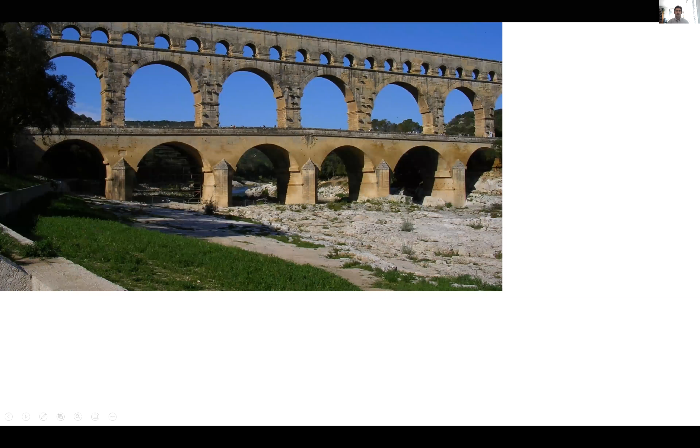Throughout history, water undoubtedly has been the most important resource for successful civilizations as well as thriving animal ecosystems. This is perhaps best exemplified by the Roman aqueducts as shown below. It was very evident to our early brothers and sisters that having sustained and easy access to water was paramount for the successful survival of their civilization.

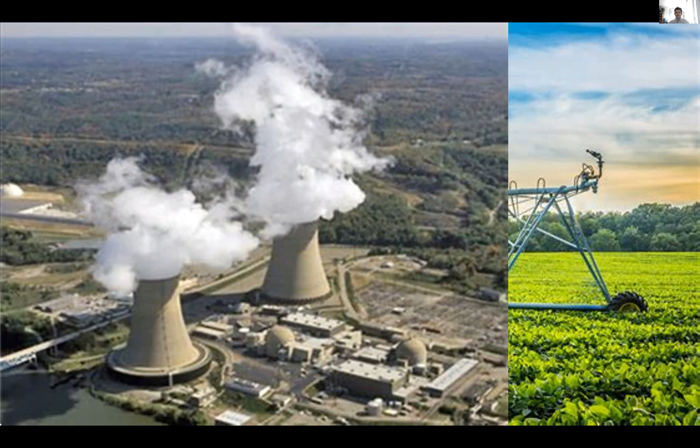As we move throughout time, this has not changed. We are still extremely dependent on water in more ways than we can even imagine. For instance, the agricultural industry in the United States consumes 137 billion gallons of water per day, while the power industry consumes 190 billion gallons of water per day. These two sectors account for more water usage than any other industries combined domestically.

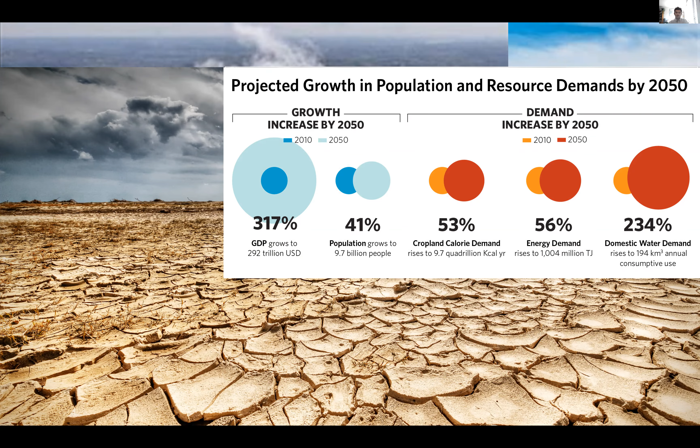And unsurprisingly, this has led to areas across the United States that look like this: semi-arid, dry regions that are water stressed and facing extreme water scarcity. And as we continue to have anticipated population growth by 2050, with some estimates anticipating 41% population growth, and some estimates indicating that because of this, energy demand and food demand will increase, and thereby water demand will increase to the tune of 234%. Where is this water going to come from?

And it's easy enough for us to say that water is the giver of life and master and servant of mankind, and we should start thinking about these problems sooner rather than later. And this leads us to our market problem. How can we meet this projected 234% increase in demand, especially when only 3% of all the water in the world is fresh water, and of that 3%, only 30% is usable ground or surface water?

Finding low cost and new ways to treat non-traditional water sources is going to be paramount. And when I'm talking about non-traditional water sources, I'm talking about water sources that you wouldn't normally think of when you think of where to get water from. So for example, I'm talking about produced waters. And produced waters are essentially waters that are produced from some sort of industrial activity. And for this instance, I'm going to be talking about produced waters from oil and gas companies.

And it's quite astounding. When you actually drill for oil, you don't just get oil that comes up. You actually get water and oil, and actually a lot more water than oil. In fact, you get 10 barrels of water for every barrel of oil. This is actually astounding and kind of mind-boggling, really. And it's estimated that in the United States alone, we produce 630 to 840 billion gallons each year. That's 1.72 to 2.3 billion with a B per day. The average urban area consumes about 300 million per day, to put that in perspective.

And so currently, a lot of this is actually just re-injected into the ground, 90% of it back into the ground. 10% of all the produced water is actually low enough in salinity that it can be sold and then blended with fresh water. So the way this works really is because you're drilling at different sites, you get different salinity waters when you bring up the oil. And some of it's low salinity enough that they don't have to treat it much, and they can just mix it with fresh water and sell it. And they do right now in Bakersfield, California, selling it around $1.25 per meter cubed.

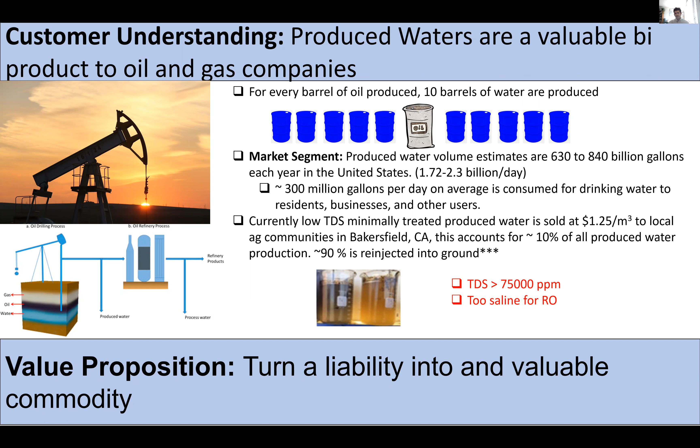And so further though, this water has to be re-injected because it's just too saline to be treated any other way, especially with conventional methods such as reverse osmosis. It has too much stuff in it for RO. So they have to inject it in the ground. And I put these asterisks because it's actually a liability. These things, they're finding out, are causing earthquakes, and companies are facing litigation. There's a whole host of environmental concerns, and it's turning into an issue, and they need to figure out a way to deal with it. And so our value proposition is to turn this liability into a valuable commodity for these companies.

Competing technologies do exist. They're either thermal or membrane based generally, but none of them really work that well. But let's go ahead and talk about thermal desalination first. And it's what you would think. It's actually just heating up water and then cooling that vapor and then condensing it as fresh water. And this is usually mechanical vapor compression, membrane distillation, or just traditional distillation. The problem is it's very energy intensive.

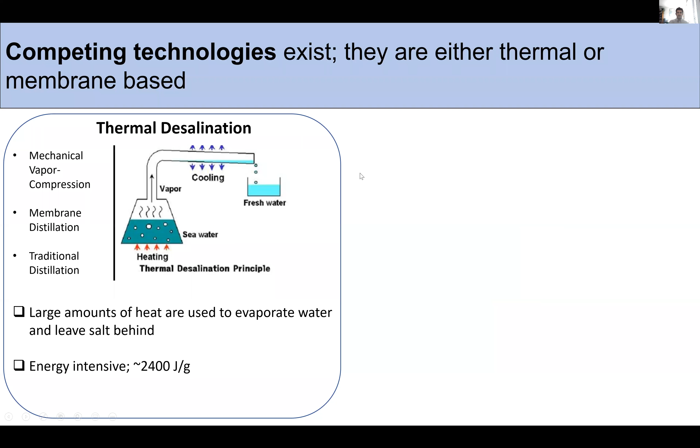As I mentioned, about 2,400 joules per gram is the enthalpy of vaporization for water. So we have to avoid this first order phase transition in order to get by this, because we definitely don't want to do things that employ these very high energy intensive phase transitions. The other thing is membrane desalination, but again, this comes with its own problems, as I was alluding to with RO earlier.

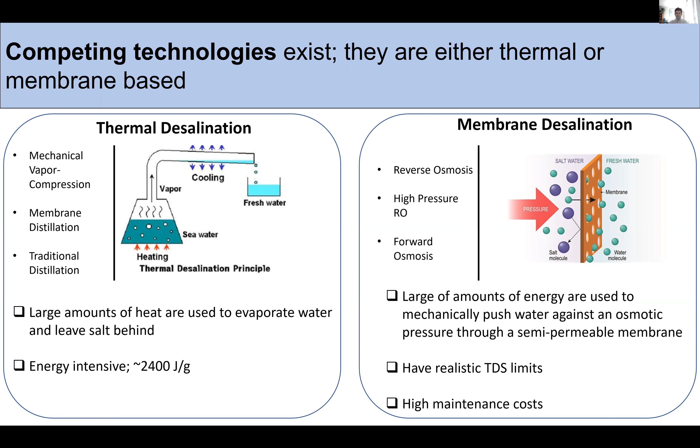Essentially, the pressures for these produced waters are just too high for these membranes to handle. If they even did work, you would have such high maintenance costs for membrane replacement. So this also is not an option.

One membrane technology that I have not talked about is something called forward osmosis. And this is quite attractive because in forward osmosis, you're actually using something called a draw solution, which is placed on one side, and then you have a feed solution. And the feed solution has a lower osmotic pressure than this draw solution. So essentially, you're still relying on a membrane that's in the middle, but you're separating these two different solutions. And because of this difference in pressure, you get an equilibrium, and water passes through the membrane.

Same principle as RO, except you're not forcing pressure, using natural osmotic equilibrium. So this is essentially an energy-free process. The draw solution gets diluted, then you have to recover the draw solution and you get your product water. This is where the problem comes in, because it has made FO kind of a niche technology, because this draw regeneration is typically very, very expensive.

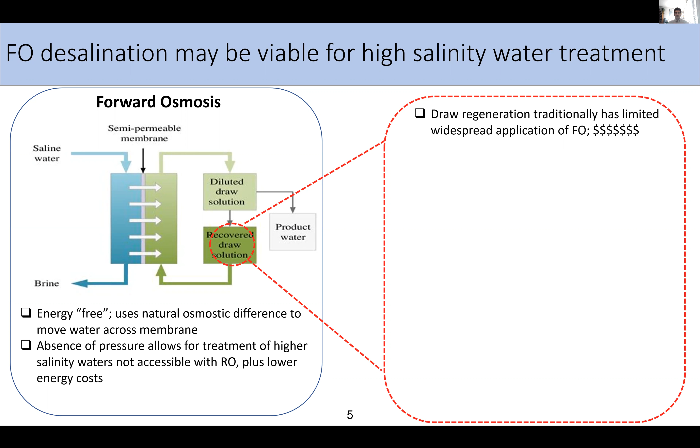And what we've done is we've tried to curb down the cost of this regeneration and tried to do it with an energy source that is essentially free, and that's solar energy. And so what we've come up with is a way to take this wastewater, do something called engineered FO, where we use a special draw solution that's thermally responsive, and it responds to these small temperature changes from the sun, and we can induce these phase changes as seen here, where you get clean water on the top and your draw solution on the bottom, and then you get your treated water and you can recycle the draw solution.

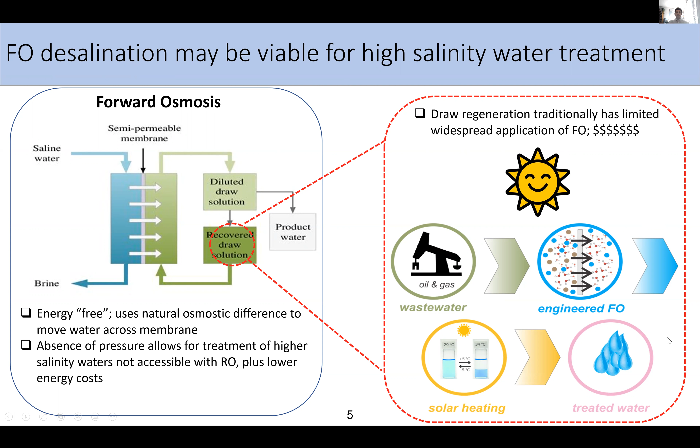And so we actually did this, and it worked for current oil and gas waters here in California. So we went down to a couple fields that are operated by the CRC in Kern County, South Mountain and Elk Hills. We did a couple others also, but they have TDS levels, for example, these two, 53,000 and 30,000. And just for a normal seawater RO plant, it's about 30 to 35,000. So South Mountain especially is much higher.

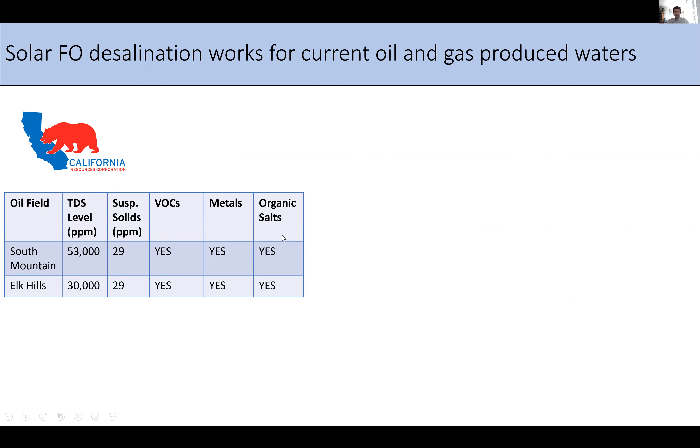Higher suspended solids, 29 ppm. They have VOCs, volatile organic compounds, yes. They have metals, yes, and they have organic salts, yes. So it has everything in it. It's nasty stuff. And what we've shown is that we can take this, we can do this gravity filtration, our osmotic step, where we dilute our draw solution, and we put it into something called a photonic heater, which essentially converts solar radiation into heat.

And then we do a nanofiltration polishing step that removes a residual 1% or 2% of the ionic liquid that maintains itself in the aqueous layer after it phase separates. And as you can see, we can go from something that looks like this to something that looks like this and show about 99.97% pure water, which is a great accomplishment in itself.

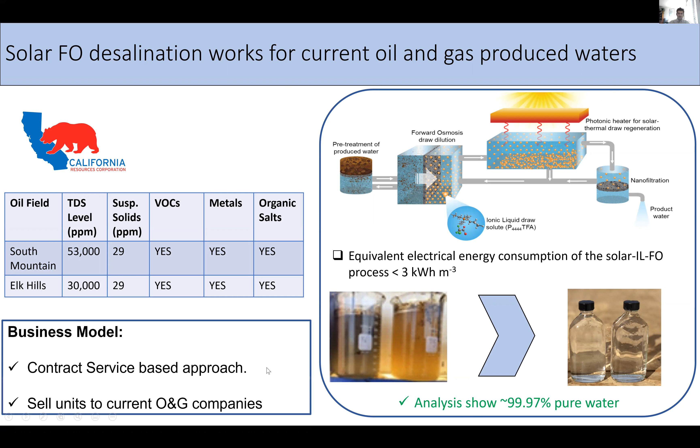And so really the business model, or how we're thinking about this, is contract-based, because they already have the capabilities to handle these massive quantities of water, and then sell it to a current market that exists to agricultural communities within Bakersfield or other communities that are nearby oil and gas producing regions.

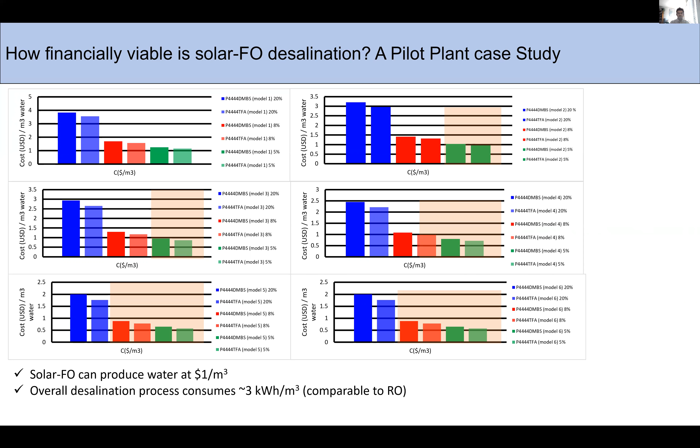How financially viable is this? We did a brief techno-economic analysis that we can talk more about later, but it was 5,000 liters per day, considering CapEx, OpEx, and varying discount rates. And of all our models, about half show that we can do this under $1 per meter cubed at about 3 kilowatt hours per meter cubed of energy intensity. And this is all using experimental lab-based data, and also at a small scale. If we increase the scale and get better experimental values from actual pilot plant studies, this should even further reduce the cost.

The team of how we're doing this is essentially Lawrence Berkeley National Lab and the California Resources Corporation in Bakersfield, California. And the members of this team are myself, Dr. Andrew Haddad, I'm a research scientist at LBNL. Akanksha Menon is a postdoctoral fellow at LBNL. Robert Kostecki is a division director at LBL, and Ravi Prasher is an associate lab director at Lawrence Berkeley National Lab.

Within this ecosystem, we're planning on going down to these oil fields once COVID gives us a break, to deploy our 5,000 liter per day prototype, and to see if we really can achieve $1 per meter cubed of water produced. Then this water will eventually be sold to the agricultural community that surrounds these oil fields in Bakersfield. And as I said, currently they already have this in place, where they're selling approximately 10% of their current produced water. If they can increase this value to even higher percentages, this is going to be very attractive for the oil and gas companies, as well as for us to expand our horizons.